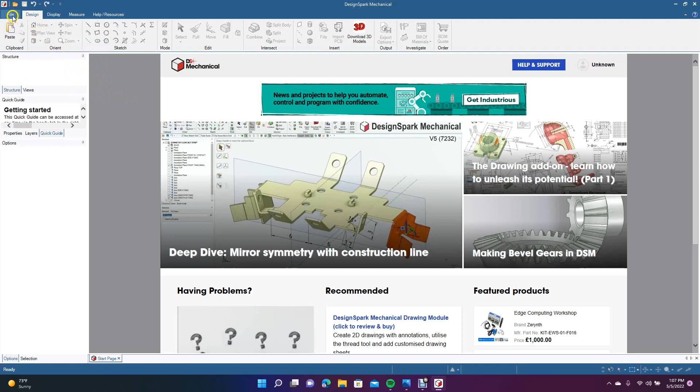I didn't have the snap to guides on, and when I put my initial circles out there, two of them were slightly offset. It wasn't enough for me to notice initially, but toward the end of the video, around the 14-minute mark, I did realize the mistake that I had made. I got rid of two of the circles and redrew them, but I'm going to go ahead and create a new one because I don't want to put videos out there that are giving you guys faulty or bad information. I want to make sure that everything I put out is good and you guys enjoy it.

So we're going to go ahead and go New Design. I'm going to come over here to File and go down to DesignSpark Options and make sure that we're on units, and we're on millimeters, that's good.

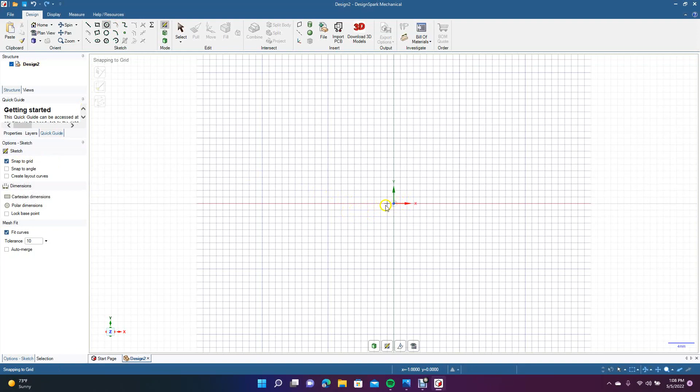Now we're going to go to Plan View. This is going to be a 160 millimeter disc. I'm going to go ahead and type the first one, but want to make sure that I have snap to grid on, so that's going to prevent the mistake that I did earlier. So we'll go ahead and go 160, Control minus.

We're going to bring in kind of a sample to use as a guide. We'll go ahead and click and drag that in. Let's put that kind of in the center.

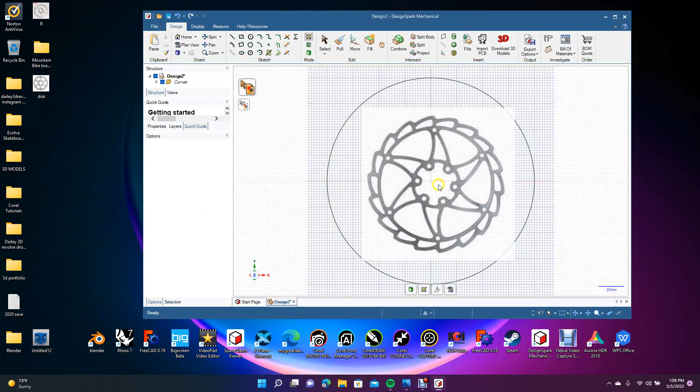Now let's get rid of that one, we don't need two of them. Okay, get this. Click, delete. Okay, now we're going to click this one.

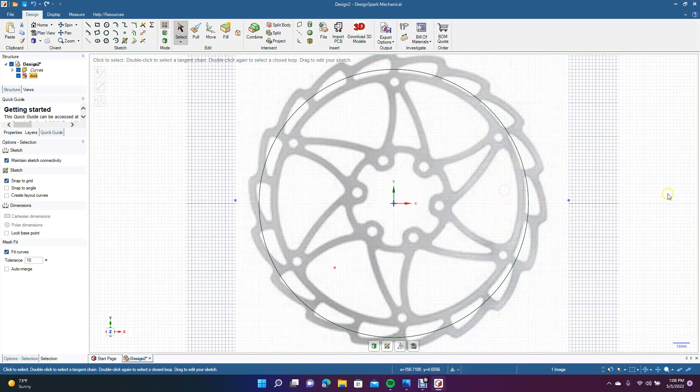Go ahead and click on the corner there and just hold down the shift key, scale it up, Control minus. Actually, undo that, let's put that in the center. Control minus, scale down a little bit, hold down your shift key, and then scale down a little bit more. Okay, that's going to be good. Okay, so let's go Control plus.

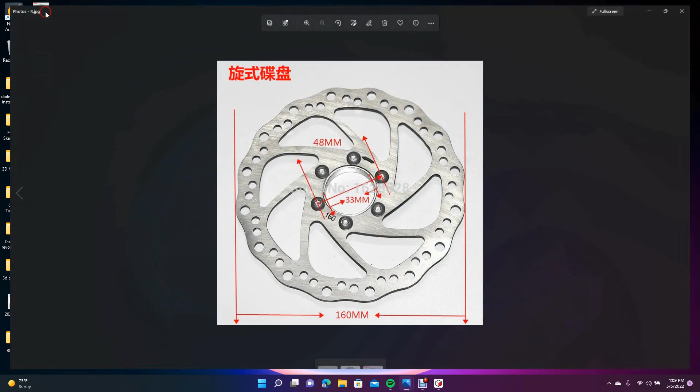No, excuse me, I'm going to go ahead and get the circle. Make sure your snap is on. Then you're going to go, is it 48? 48, that's going to be where our circles go. Let's double check that measurement. Okay, it's 48, so that's right.

Let's go back to DesignSpark. So this is where our initial circles are going to be. Now we'll go ahead and get the circle tool, and we're going to go ahead and put one out there, it's going to be 60. Then we're going to go put one out there, that's going to be 125, or actually let's make that 126.

So we'll go center there, let's go up here, 126, and then we're going to go 126. Need to make that a little bit thinner. Let's pull this in a little bit more. Let's go 128. Okay, all right, that's good right there. Okay, this is the base of our disc brake.

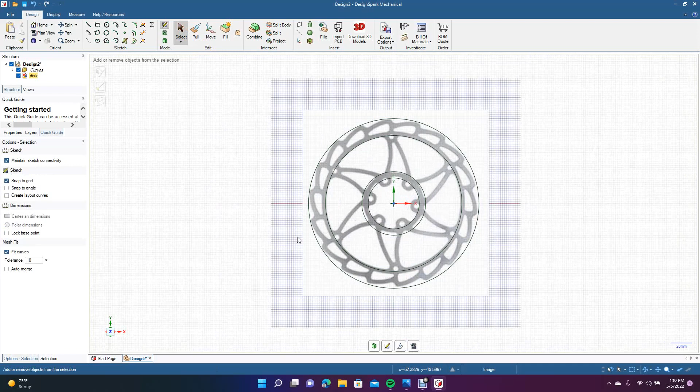It's Control plus. Okay, now we're going to go ahead and I'm going to put this circle in here. So we'll go ahead and get that circle. Let's see here, I'm going to go ahead and create a line here from midpoint to midpoint.

Okay, now we're going to go select that, we're going to rotate it. So go to pull, about 20 degrees. Okay, that's where we're going to put our first circle, it's going to be 5 millimeters.

All right, so let's go ahead and get rid of this line here. Let's go ahead and get that, create another circle, and that's going to be this outer one right here, which is going to be 12.

Okay, now we're going to go ahead and select both of these, we're going to go to move. We're going to come over here and check create pattern. We're going to drag down to the center, this time there's only one center, unlike the last time. Now we're going to drag these around so there's 6 of them. Select the click off. Let's make sure that this is all correct, and it is.

Okay, now we're going to go get our trim away tool. We're going to start trimming away these pieces here. Oops, undo. Okay, you want it to be like this right here. So go ahead and just get the rest of these.

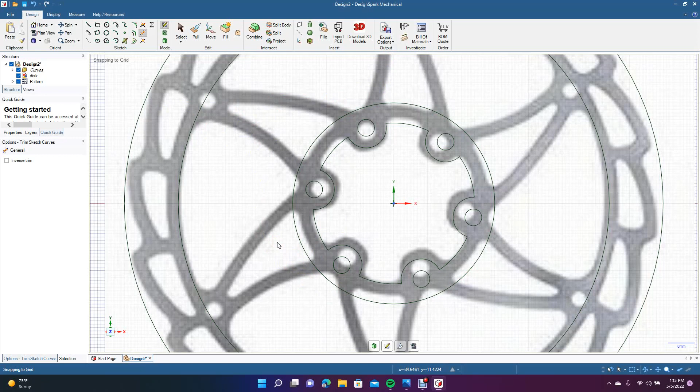You notice on the last video I did, the two circles were misaligned so slightly that it was really hard to notice until I started rotating this shape around, and I noticed it wasn't connecting. Right away when I saw that, I said, uh-oh, something's not right. So you got to break it down, investigate, and figure out where you went wrong. But the most important thing is to try to do it right the first time, and then you won't have those issues. Okay, so we're going to go ahead and put a line in here.

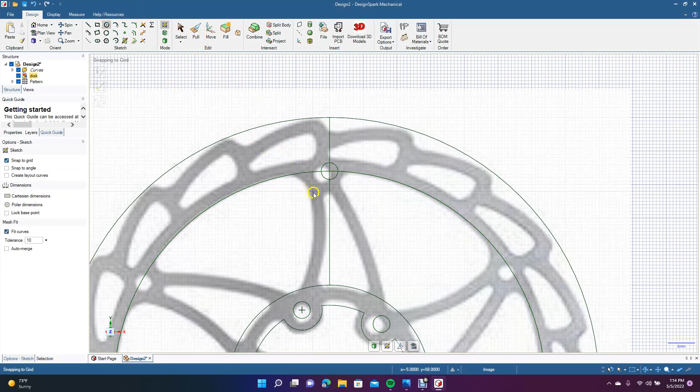I want to actually start that circle right there instead of how it is. Control plus. Pan down. Let's get your circle tool. Let's put a 5mm circle in there. Looks like there's a little bit of a circle here, so I'm going to add that. We'll go 12.

Okay, and I'm going to get rid of this line here. Now we're going to get our tangent arc, and we'll go from here down to here. Then we're going to do the tangent arc again. Actually, undo that. Let's go from here over to here like this.

Okay, that's good. Don't have to follow theirs exactly, so we're just going to offset this 4mm over. Actually, let's change that. I want it to be close to that line there, so let's undo that. Let's go ahead and create the tangent arc. Let's do the same thing over here on this side.

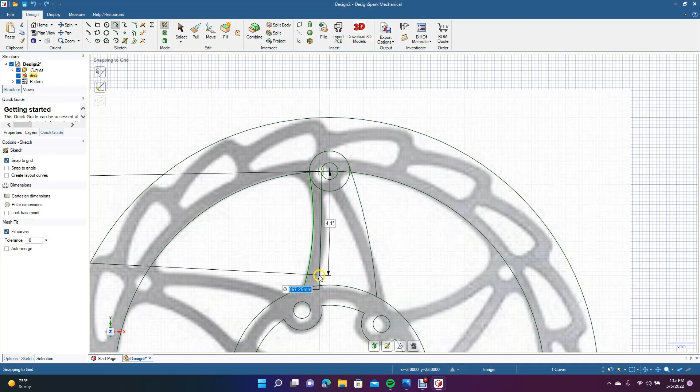Actually, no, I'm not going to do that. I'm going to offset it. We're going to go offset 3.5, that's from there to there, so we're going to offset this one 3.5. Okay, that's good. This looks good here.

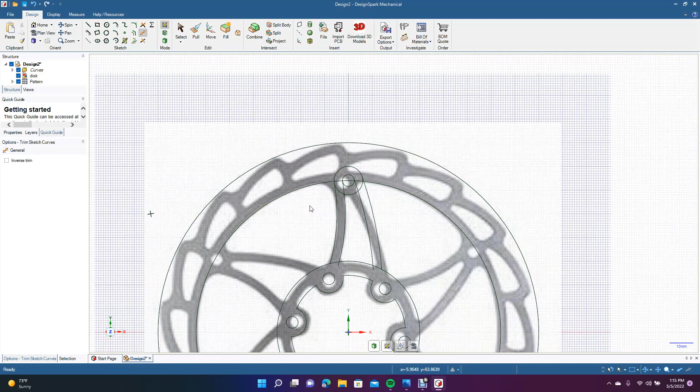Now we'll go ahead and get our trim away tool, and we're going to... I'm going to have to come up a little bit more with this, right to here, because this is where the circles are going to go. Alright, let's Control minus. I'm going to add one more circle in there.

Get the circle tool. We're going to come up to here. We're going to type in 135. Okay, now we're going to Control plus.

We're going to grab our trim away tool. Let's get these, get rid of those, get rid of these little pieces here, get rid of that middle piece. Undo, undo. There's two little pieces right there.

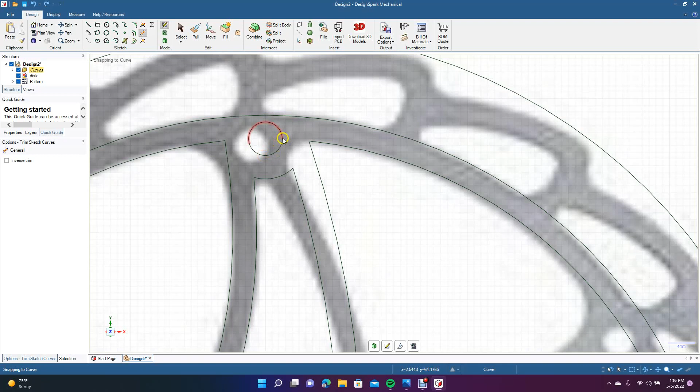So we're going to have to zoom in to get those. Let's pan over, get the trim away. Let's grab that piece there and then the little piece right there.

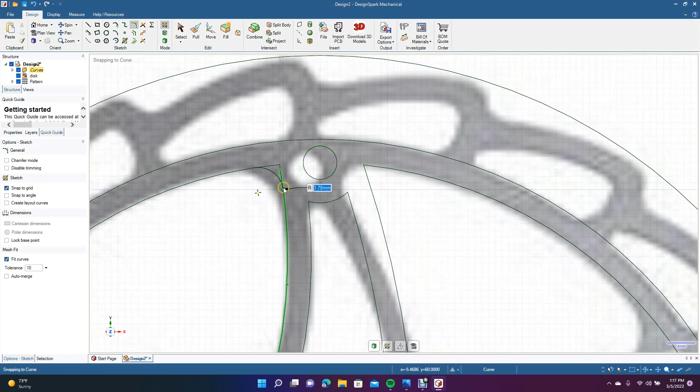All right, now we're going to Control plus. I'm going to add in some geometry right now so we don't have to worry about doing it after we rotate this. So we're going to add a 3mm fillet right there, and a 3mm fillet there.

Okay, now we're going to go ahead and trim this away. All right, now let's do another fillet down here before we round this thing. Let's do 2.5. Let's do 6 there. 6 there. Okay.

Now one more fillet before we change any of this. Let's go here. 2.5. 2.5. Okay.

So I might bring this line up a little bit more. Actually, we can get rid of that. We're just going to use, don't need that. This is going to be where our disc brakes go.

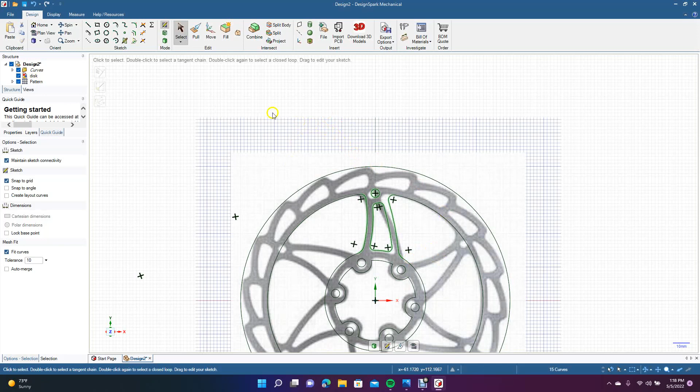So, okay, let's Control minus. Let's go ahead and select what we just drew. Looks like I got everything. Okay, you're going to go ahead and move, you're going to create pattern.

Make sure that's checked. You're going to drag this over to the center there, and you're going to wrap this around so you have 6. Then you're going to select the click off, Control minus.

Let's Control plus, Control plus. Let's pan up to make sure this is all good. Everything is touching. Looks like how it's supposed to be.

Okay, now you're going to go ahead and get your trim away tool. Let's get rid of these, let's get rid of these lines here. This one here, this one here.

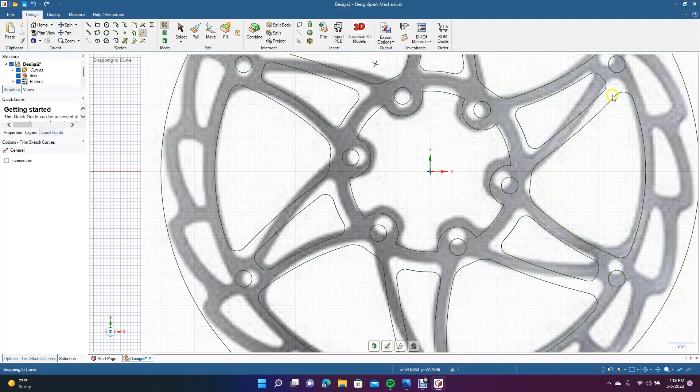Okay, let's get this trimmed away. Let's get rid of these right here. Oops, I keep clicking on the wrong one. Let's get rid of that there, and that there. Let's pan up and get our delete.

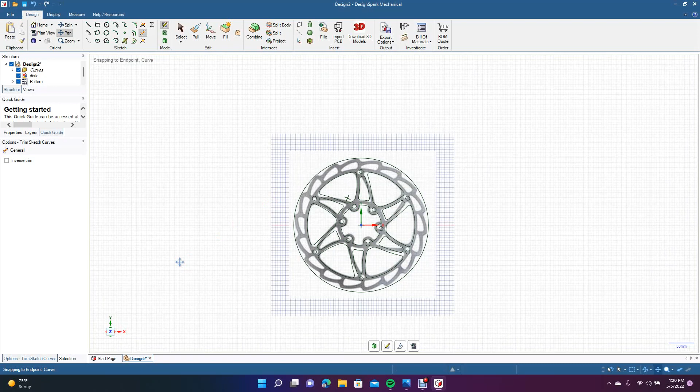Okay, this actually doesn't look too bad. Although I've created a lot of models over the years, I definitely don't claim to be a professional. I'm just doing my best to throw videos out there so you guys can learn, especially beginners, how to make your own models. I do make mistakes from time to time, but I'm grateful I'm able to catch them, or at least they're pointed out to me, and then I can remedy the situation.

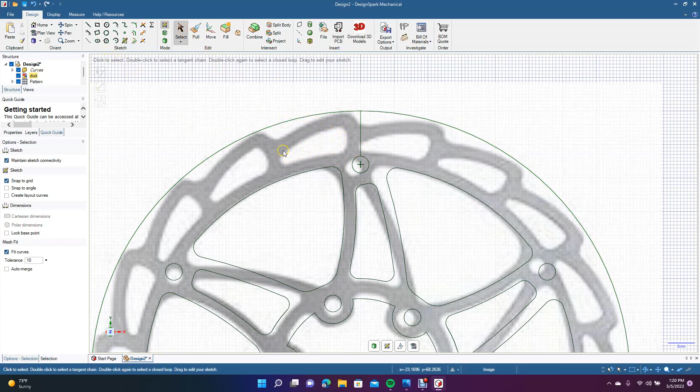Okay, so now what we're going to do is put our circles in here for the vents. Actually, I could create this vent right here, although it's going to look strange without this shape on the outside. Let's just go and do circles instead, that's going to be fine.

Alright, let's go do a 4mm vent hole, and then we're going to grab another one.

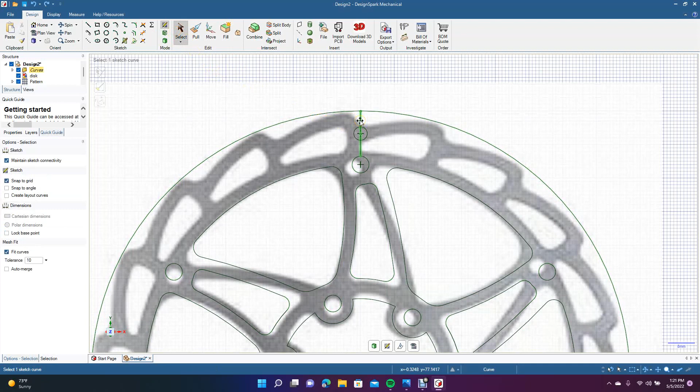Let's undo. Let's go ahead and right mouse click on this, set as mirror, so whatever we draw on the left is going to show up on the right, vice versa. 4mm, let's come down to here and draw, 4mm. So basically this is going to be our vent pattern.

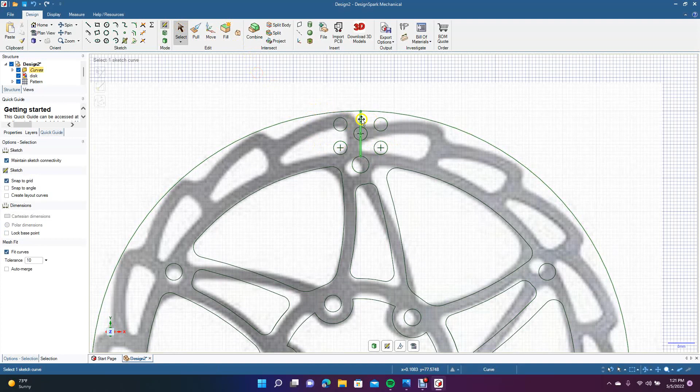Let's go ahead and get rid of that, and zoom in a little bit so we can see how this vent looks. Okay, I think I'm going to move this down a little bit, looks like it's not quite centered. Okay, that doesn't look too bad.

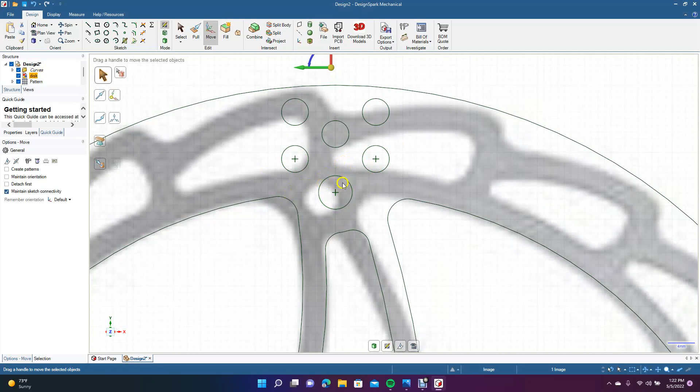And then this, we'll actually sweep these around. Okay, so let's control minus. Let's go ahead and select these. Let's go to... uh-oh, what happened? Okay, move. We're going to go to create pattern, control minus, and drag these down to the middle.

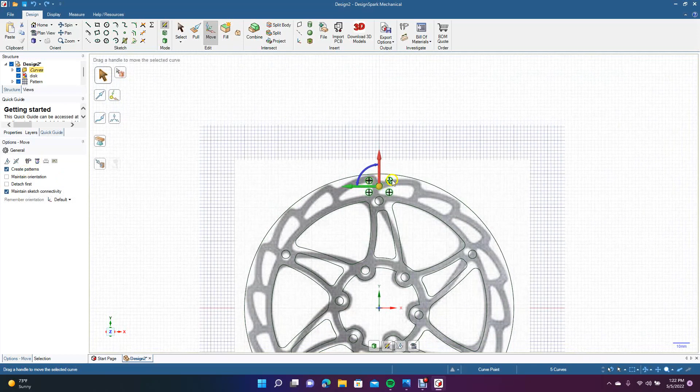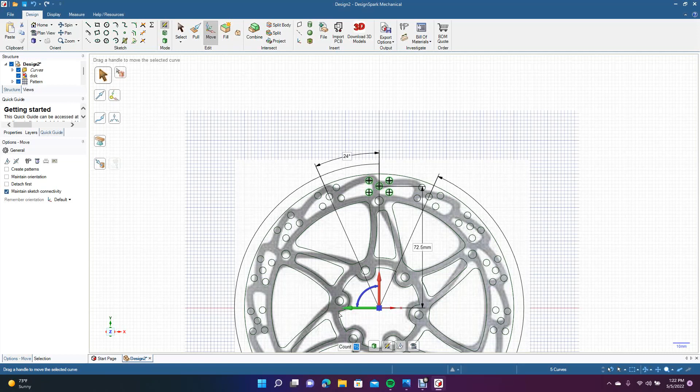Right there, and then we're going to make these go around, and for count we're going to put 20. Does 20 seem okay, or does that seem like too many? Undo, let's try 15 for the count. Yeah, let's go 15, and then we'll go select the click off.

Okay, now we're going to get rid of this, don't need it anymore. Now let's pan up. Okay, this is going to be our disc brake. Looks like everything is good here, I don't see any issues like the last one had, but you never know.

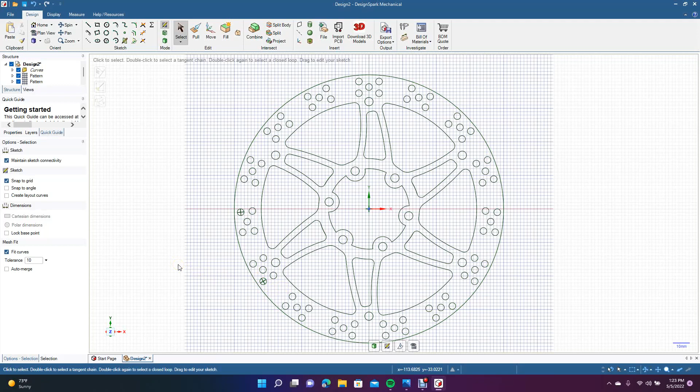Control minus, let's go ahead and spin this. Pull. Let's go ahead and get rid of these, we're going to go ahead and get rid of these, don't need those. Okay, delete.

Now I'm going to do a quick little Google search to see how thick a mountain bike disc is. I believe it's around 2 millimeters, might be 3. We're just going to go with 3 millimeters.

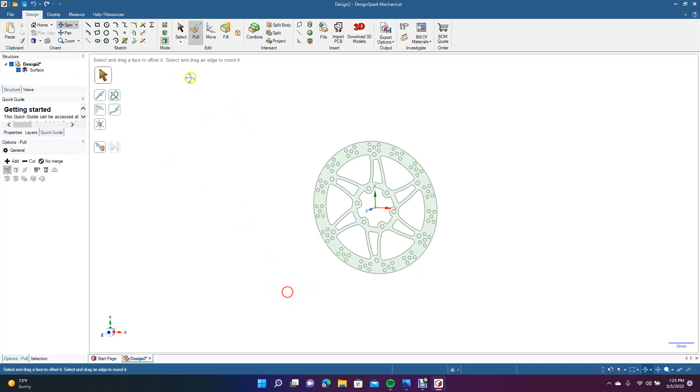You can always change this if you need to. So go ahead and pull, then we're going to go ahead and pull from both sides, and then I'm just going to type in 3. Okay.

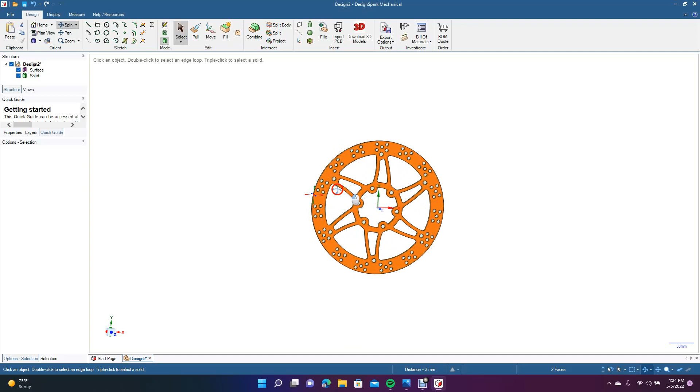Now we're going to go ahead and spin. This looks pretty good, I'm pretty happy with this. So control plus, now we're going to go ahead and get rid of these.

Don't need any of these little circles that are left inside. So just hold down the shift key, take your time. You can go ahead and drag marquee too, marquee will get rid of probably some of the inside ones like this. Alright.

Just delete, this will be a little bit easier. Uh-oh, you want to be careful though. Don't delete that stuff. So if you have any issues, just go back to doing it manually. See, that you don't want to do. Okay.

Oh, looks like you had one up here too. Let's undo that a couple of times. All right, I'm going to go back to deleting manually because I don't want to delete the actual circle, just the one inside.

Don't worry, there are ways to speed things up in DesignSpark Mechanical, but you can also work at your own pace, so you don't have to do things super fast all the time. Just whatever works for you.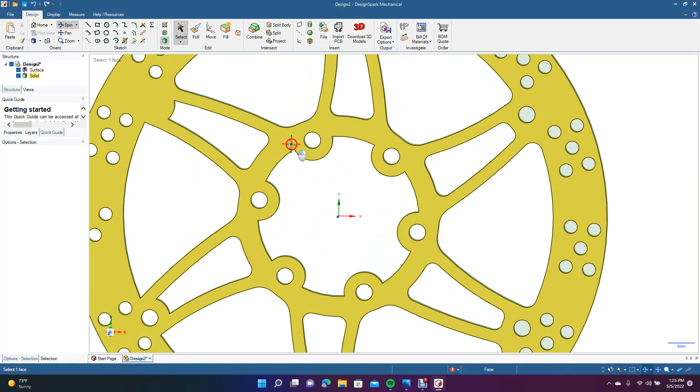Let's zoom in. I'll pan down, and now I'll go ahead and get rid of these little circles here.

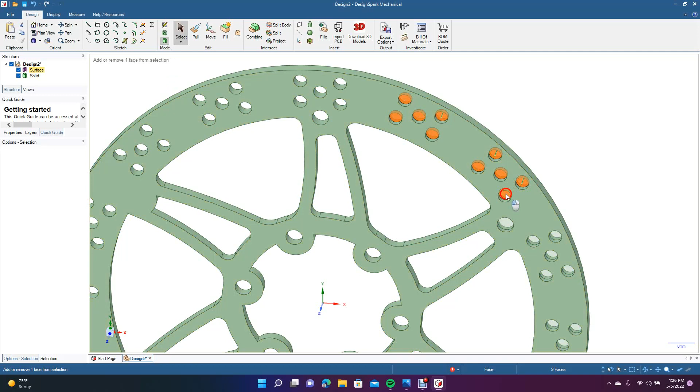Hold down the control key and get multiple selections - probably the easiest way to get rid of all of them. Delete, and then go ahead and get rid of these. Let's pan up a little bit so we can see these last few. Select, delete, let's go for the spin.

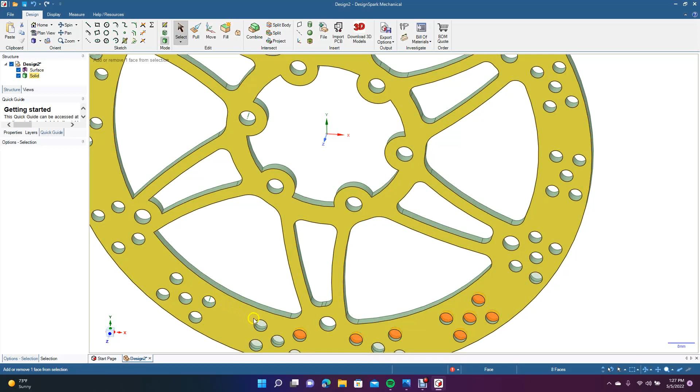A few more circles and then we'll add some detail and we'll be done with this. Pan up a little bit. I think I missed a few - go to select, missed this one here. Okay, all right, now we're done.

Now we're going to go ahead and go to top view, see where we might want to add some detail. All right, I'm going to add some detail here, so we'll go Control plus. I'm going to add a fillet here.

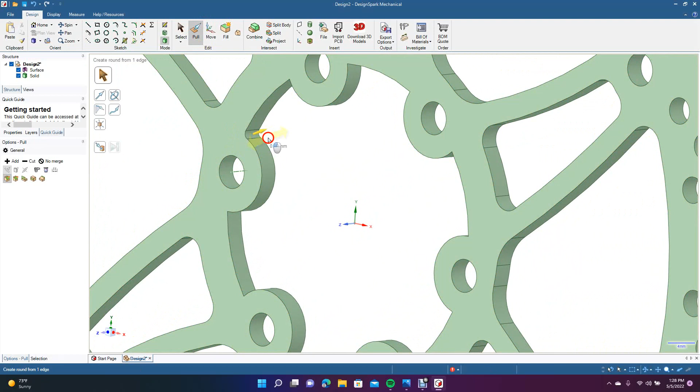Let's add a 1 millimeter fillet. Spin this around so you get all of them.

Put a 1 millimeter fillet in all these little corners right here. Let's go ahead and spin that. Let's go to pull, so 1.

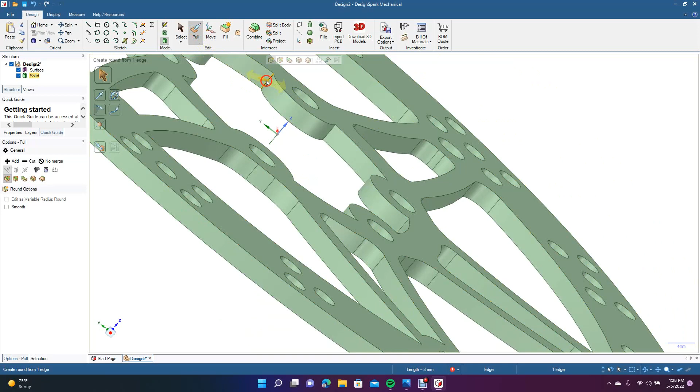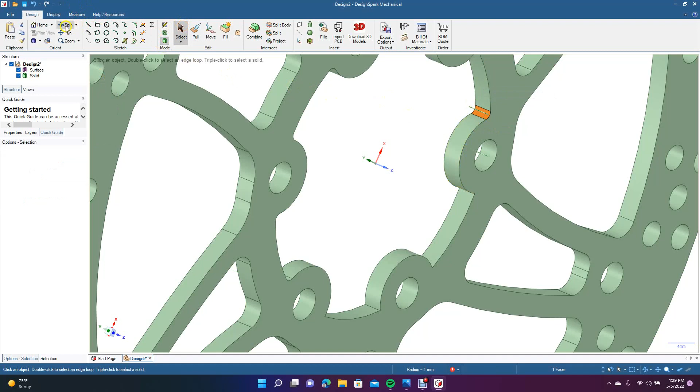Take your time on this, make sure you get all the corners. Go ahead and spin that.

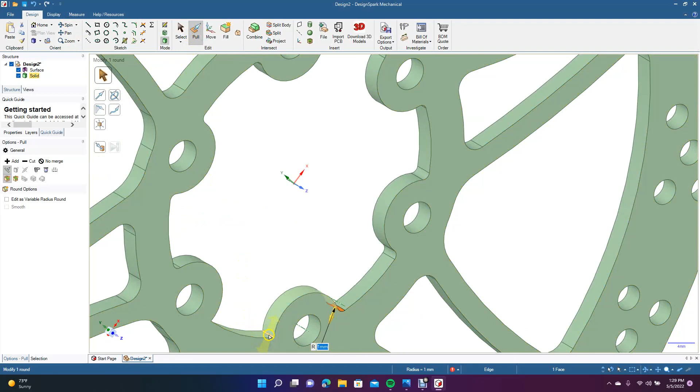You're almost done here, just a couple more. Let's go to pull. Okay, I think I'm finished with the inside there. Let's go look.

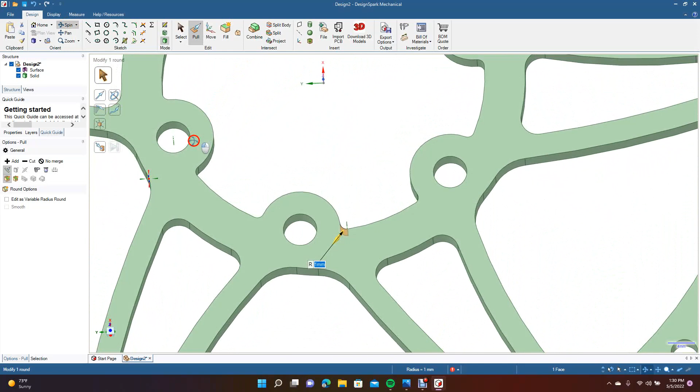Okay, Control minus. Then what I might do is probably add some fillets to these.

0.5 - you're going to add 0.5 to these. Triple click to get everything, type in 0.5. Do the same on this side, same right here, and then the same right here.

Okay, now let's go ahead and get these. Hold down the control key, click till everything is selected, type in 0.5.

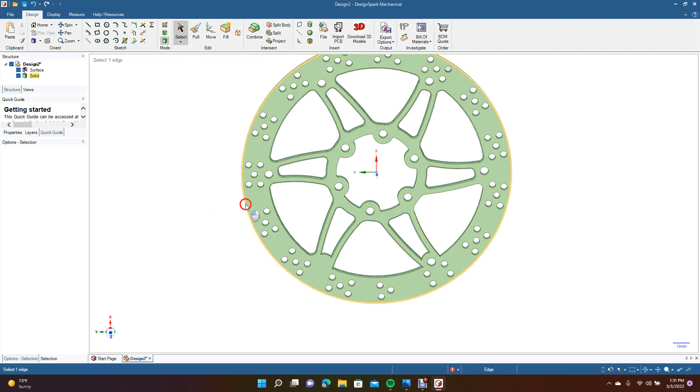Now I want to put a 0.5 around the top there. 0.5. Okay, now I want to get these. Go to pull, 0.5. Okay, this looks good.

Now going to spin it around, do the same on the back side here. Go to pull, click till everything is selected. Hold down your control key, get multiple. Since we're doing all of these the same 0.5, all we really need to do is just click till everything is selected.

Make sure everything gets selected and you're not missing anything. And then this one here. Okay, missing that. Go to pull, type in 0.5.

Okay, now let's go to pull and get all these. Type in 0.5. Okay, let's get rid of that one there, you don't need it.

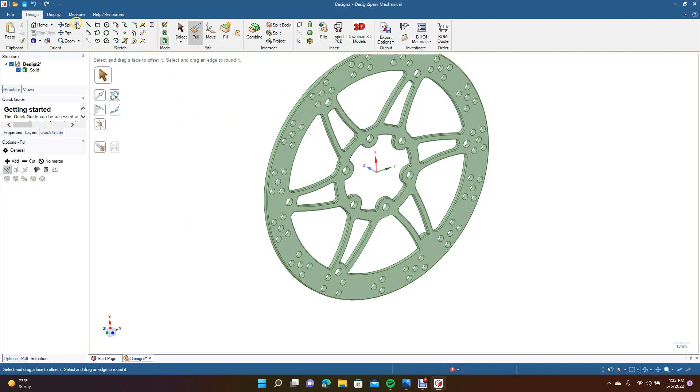Spin - I think you need to put a fillet in these. I don't think it took 0.5. Okay, go ahead and spin this around. Go to pull, grab that one, type in 0.5.

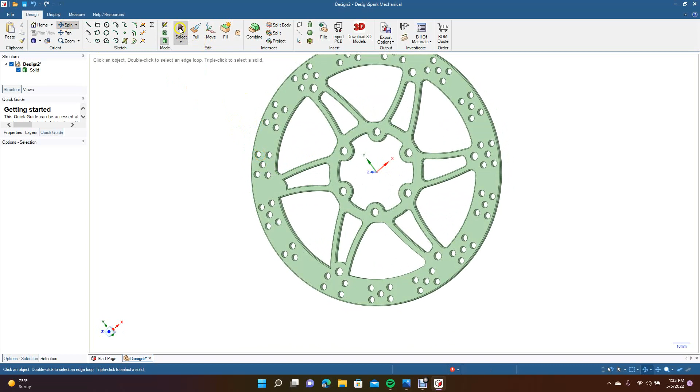Now I'm not going to add any fillets to the cooling holes and vents - I think I'm just going to leave those as is. But I will put some fillets on these circles here for the bolts.

We'll do the same as everything else, 0.5. So we'll go ahead and hold down the control key to get all these. Go to pull, 0.5. Okay, that's going to be good for the bolts.

Spin this around to the back side, do a 0.5 on these and then you're done. I think these have a circle in them that needs to get done.

All right, so let's go to pull, hold down the control key, get all these. Go 0.5. Okay, that's going to end our disc brake tutorial.

Actually, this was a disc brake rebuild tutorial. Actually, what I need to do is these didn't get changed, so I'm going to zoom in on these. Let's pan this over. I don't think these got filleted, so it doesn't look like it's going to let me do it now.

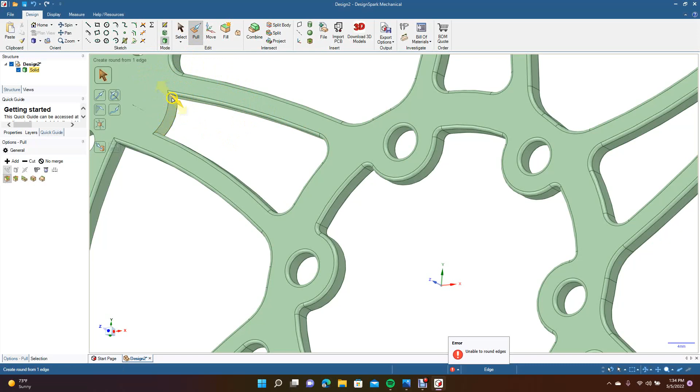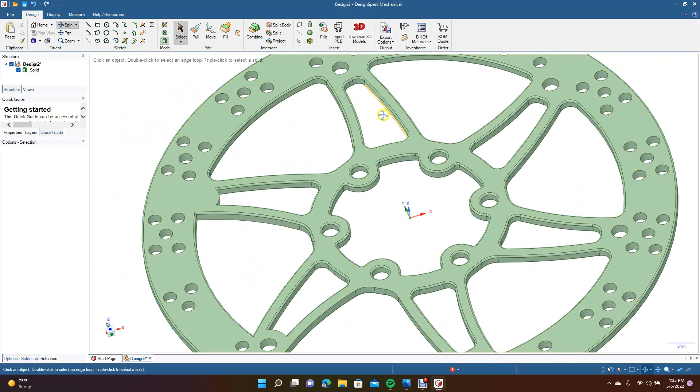Nope, spin it. Let's go to pull. Let's see how much of this didn't get fixed. All right, looks like these two got done, those two got done, those two got done. It's just these two right here. I really want those to be fixed.

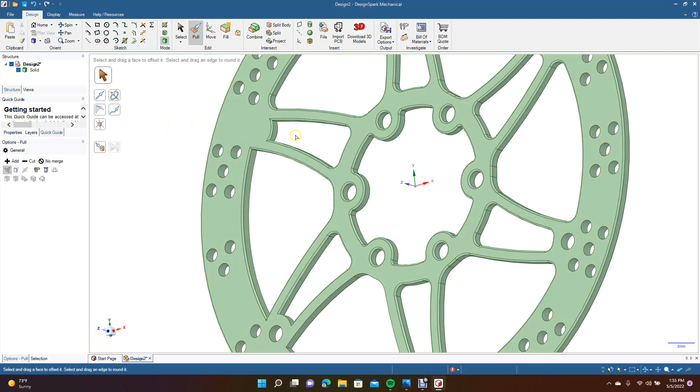So let's change those to 0.5. Let's zoom in, see if we can fix this fillet here. Not sure we're going to be able to, but we're going to try. Okay, we're going to go pull. Let's go see if I can get rid of that - delete.

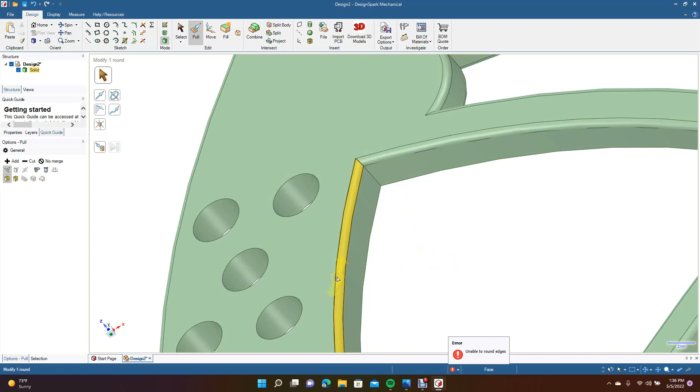No, it's not going to go. Okay, so what I would have to do is go back to where I had put the fillets in on these. I forgot. It looks like I forgot that corner there, and these right here.

I can go ahead and undo. I'd have to undo a lot. So let's... I just don't think it's going to go if I don't undo it, but I'm going to keep it like it is right now.

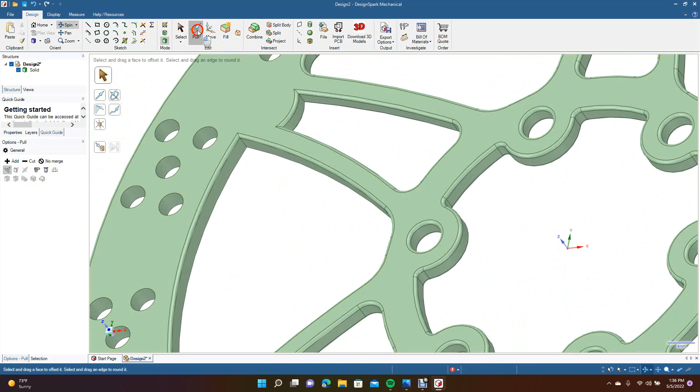Didn't want to actually make a mistake on this one, but it looks like... yeah, I wanted these to be the same as everything else, but I guess I just forgot it, you know? It happens.

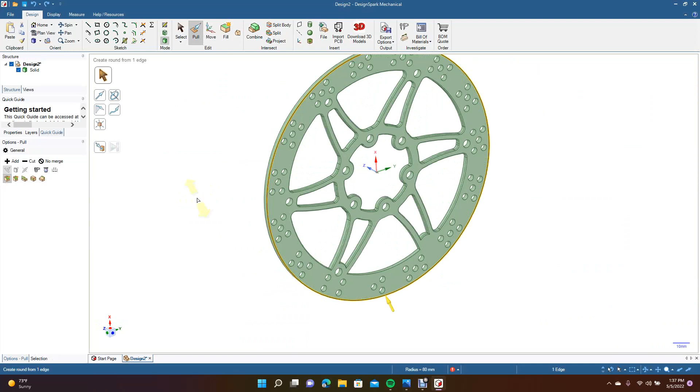Don't really want to go back that many times. Let's see what I can do as far as going back. I mean, I might be able to go back that far. Let's see.

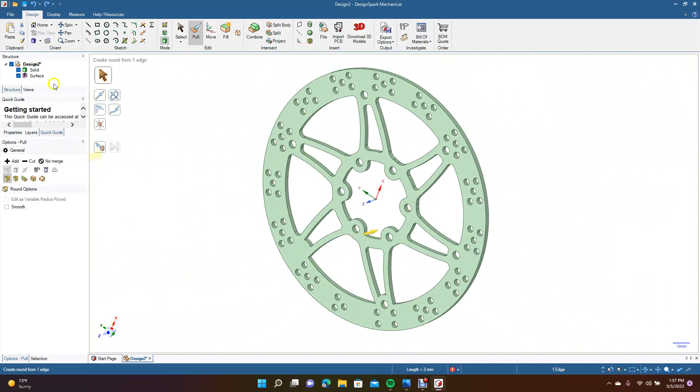Okay, it looks like it went back far enough, so let's fix this right if we can. All right, let's control Z, have to back out a few times. Get back to where we were before we added the fillets.

Okay, let's spin this. All right, let's try here. Looks like it's not even going to go now with this, with the chamfer taken off. There we go.

I think I did 2 millimeters before. 2? Let's pan over and see. Spin this around. Let's go to pull. Okay, let's see if this is.

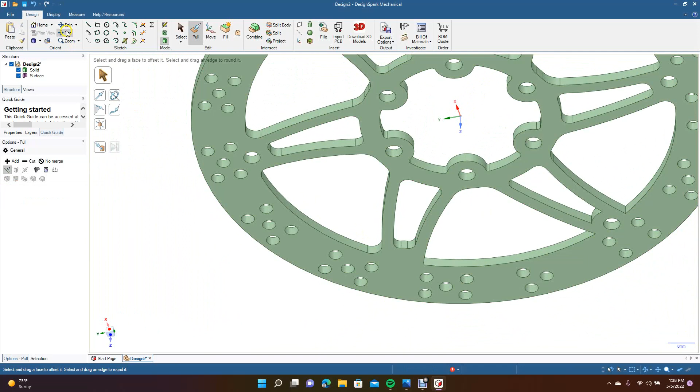Yeah, it looks like it might have been 3. It might be 3, so I'm gonna undo these 2. I want them to be right. 3? No, not 3. 2.5. Okay.

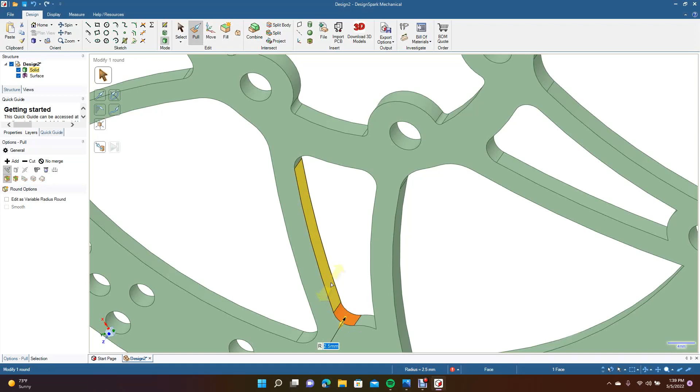Spin, just pull. Yep, 2.5 it is. Okay, now let's just go around until we get all these. Luckily we caught it early. 2.5.

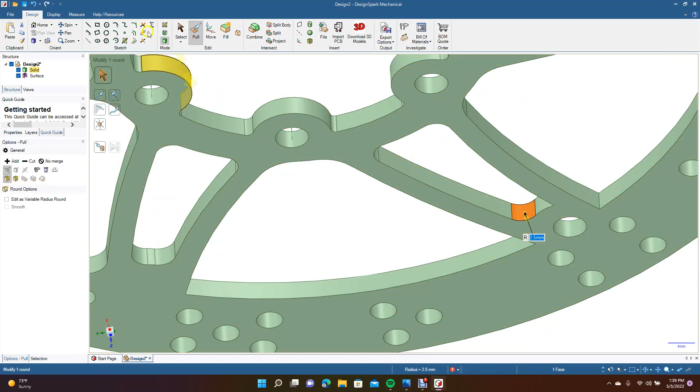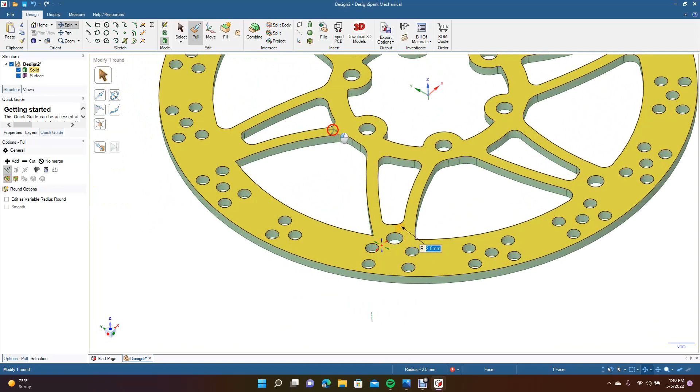Looks like you got everything except these. So let's do the same on these. I'll make sure that's good too. No, it's more than 2.5. Undo.

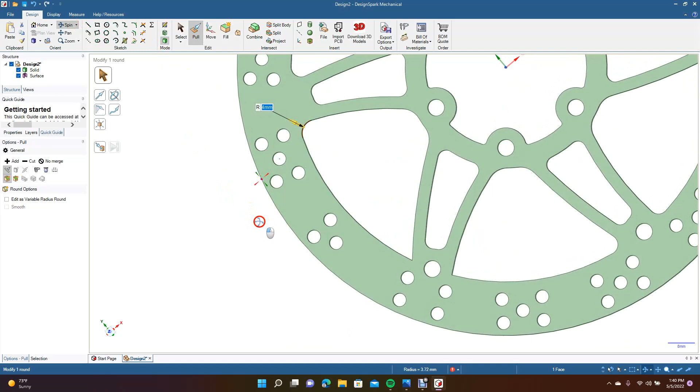Let's try 4. Let's see if 4 is going to be right. Okay, looks like 4 millimeters is the magic number. 4. Spin that around.

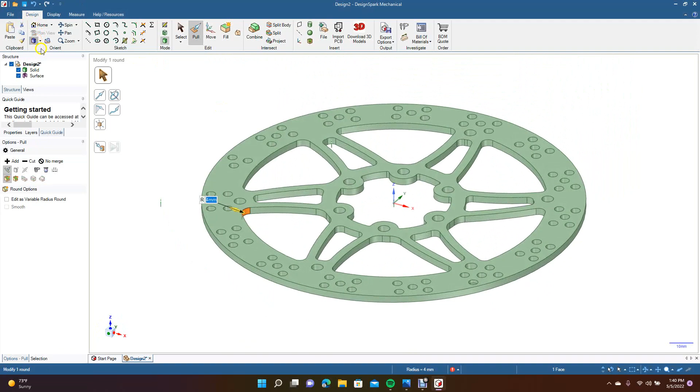4. Okay, let's control minus. Let's go back to the top view. Make sure this is correct. Okay, let's check all of these. Okay, looks like you got them all.

Okay, now you're going to have to go do the 1.5 pull on everything. Hold down Control key. Go around all of these.

Okay, go to pull, type 1.5. Oh no. 1.5, type 0.15. That's too small too. What did I have before?

Okay, let's just manually do this and see. Maybe 0.1. Okay, we're going to do 0.5. I think that's what it was the last time.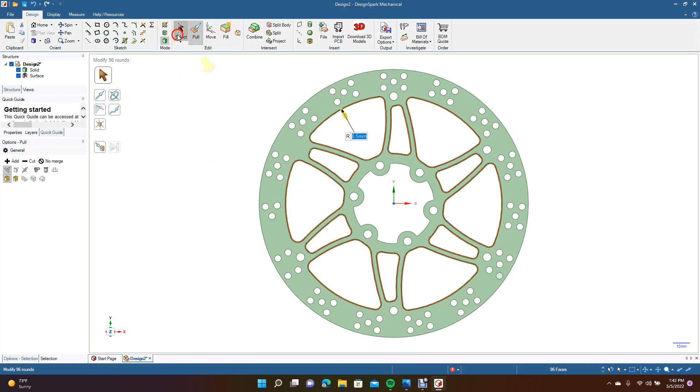Okay. Now let's get all this. Pull. 0.5. Get all these circles here.

Hold down Control key. I know this video is probably being a little bit longer than it should be, but I want to make sure this is done correctly. 0.5.

Okay, let's spin this around to the back. Let's do the same there. Let's grab these. Triple click till everything is selected.

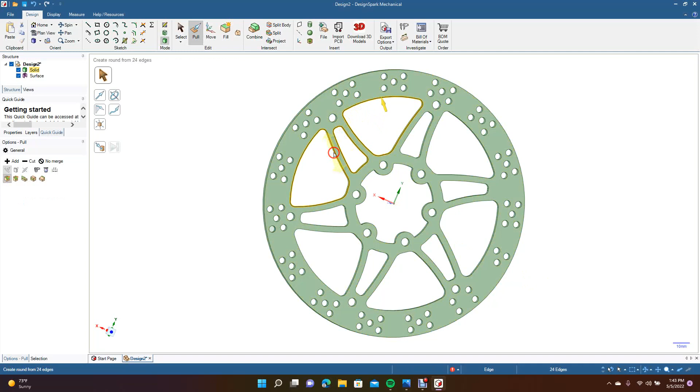Oops. Dang it. Gotta start over. Try not to rush too much, because if you rush, then you do what I just did and you'll have to start over.

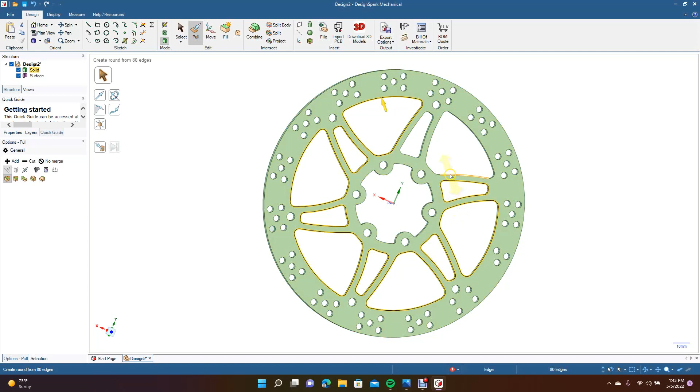Okay, make sure everything's selected. Go to pull, type 0.5. Okay. Now you're going to get this inner ring here. Go to pull, type 0.5.

Okay. I'm just going to do these circles here and then we'll be done. I'm not going to do the cooling vents. Those can just stay without a fillet.

Go to pull, 0.5. Okay, that's going to be it. Let's go to top, make sure everything's okay.

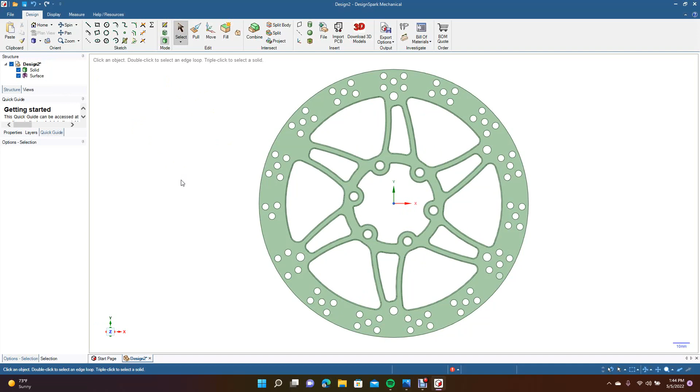Okay, that's going to end today's tutorial. This is actually a redo of the 160 millimeter mountain bike disc brake that I had created a couple days ago. This is the new one with corrections. I made a little bit different pattern this time, and I actually put less cooling vents. But this one is correct.

I went ahead and created the circles with the snap to grid on, so there was no misalignment issues. Okay, hopefully you enjoyed watching and you got something useful out of this video, and thanks again for watching.